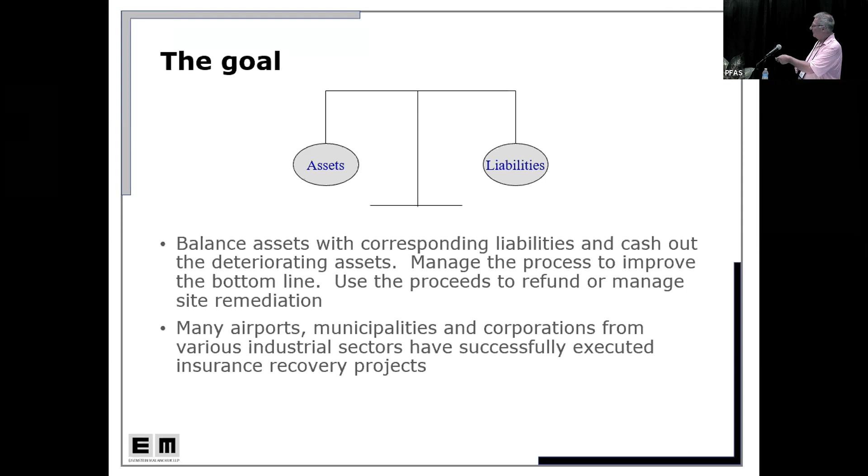Why does this work? Why does the insurance company even answer the phone when you call and say you want to submit a claim?

First of all, it's confidential. We can do it under attorney-client privilege. Sunshine laws and things like that get in the way, you may not be able to keep it confidential, but we can if you want to. You purchased insurance and paid your premiums, you're entitled to reimbursement according to the terms and conditions of those policies. The insurance companies wrote the insurance.

Insurance companies have reserves set aside for their liabilities, and your liabilities are part of their liabilities, so they have reserves set aside. And don't forget, insurance companies buy insurance too. So if they do a deal with you, they release the reserves and make a claim against their reinsurer. That's why the process goes on, because it's not such a bad deal for them.

They get these liabilities off their books. If you go to them and they say, what do you want? And we say, we want to talk about PFAS. And they say, well, there's no regulations, blah, blah, blah. We say, well, we're giving you a fire sale today, because do you think it's going to get cheaper in the future or more expensive? So on and so forth. And it's in their best interest to settle in the midst of some uncertainty.

Thank you, Dr. Malanchuk. I'm glad to see some additional faces. Maybe for next year's forum we should recommend to Gene that he serve adult beverages for the last session—it might attract a lot more people. But that's all right, it's Friday.

Our next speaker is my coworker, Rob Bogert. He's our engineering service line manager, and he's going to be discussing considerations in removal and replacement of AFFF.

Thanks, Alan. And where's the clicker here? And for those of you online, Alan's just joking. There's about 250 people here live, and we appreciate all of you.

So like Alan said, I'm going to be talking about something that's a little bit off topic. I'm a remediation engineer, but this project really wasn't related to remediation. It was related to PFAS and AFFF.

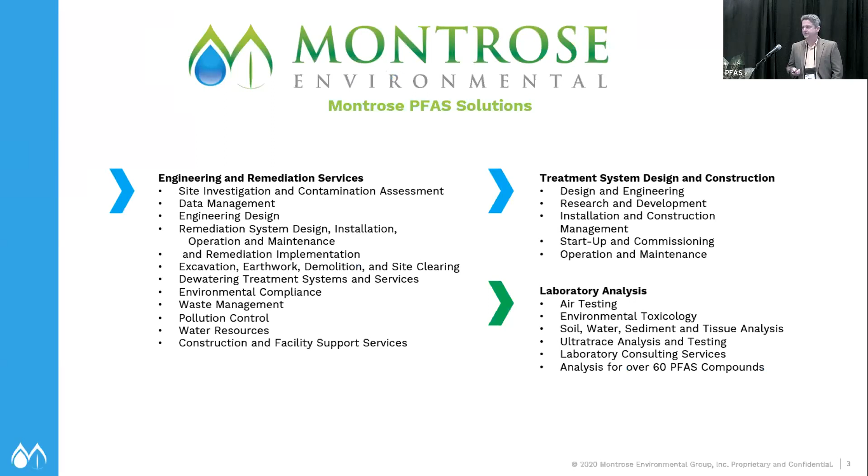I won't give myself a plug—you can read about me in my bio online—but I wanted to point out my coworker who was instrumental in this process, Ashley Rose. He's the leader of our construction and field services. He and his team were largely responsible for the work that you'll see in my last few slides. Again, I'm with MSE Group, work with Alan. We're part of the Montrose family. We're a full service consulting firm, but we also have sister companies that do treatment system design, and we do in-house laboratory testing.

After that shameless plug, I'll talk a little bit about the history. This is somewhat redundant with some of the other talks we've had. We heard that this was discovered accidentally way back in the 30s, first used commercially in the 40s. AFFF wasn't created until 1966, and then later used in 1970. From the 70s through the 90s was a relatively quiet period for PFAS and AFFF.

However, there was some concern raised about the environmental issues back in that period, but it wasn't really until 2000 that we started seeing changes in manufacturing, with PFOS and PFOA being downsized, particularly in the United States. I believe it's still manufactured in other parts of the world, but it's not currently made in the United States.

Recognizing this issue, the DoD revised their military specification for AFFF—I'll talk about that a little bit more in detail—to establish a limit for the amount of PFOS and PFOA that can be in AFFF. That was issued in 2016. And then starting in 2018, the major branches of the military started a voluntary replacement of AFFF to remove what's referred to as the legacy AFFF, the mil-spec material before 2016. That work was recently completed by all branches of the DoD.

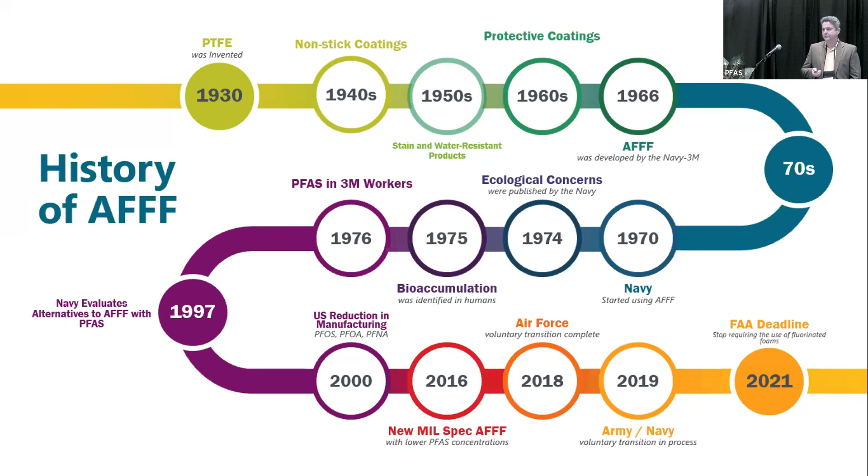Something else I wanted to point out was the military specification goes beyond just Department of Defense. The Federal Aviation Administration, FAA, up until this year was required to use AFFF, the military specification blend. They're currently evaluating options to use, and that's part of federal law right now for them to come up with a new alternative.

From as far back as I went, the past 20 years or so, PFAS and AFFF aren't really mentioned in DoD spending bills until around 2019, which had maybe one reference to PFAS. In 2020, the National Defense Authorization Act had multiple references to PFAS. That act is issued every year and funds the DoD. In 2020, there were 172 PFAS chemicals added to the EPA's Toxic Release Inventory.

This formally established that fluorine-free foam was going to be needed in the future as a replacement for AFFF. It's kind of a bad acronym: F3, fluorine-free foam, is completely different than AFFF, aqueous film-forming foam. It's a bit of a tongue twister, but fluorine-free foam, good - F3, good; AFFF, not so good. This also required it to be phased out by 2024.

More importantly, it ceased all live testing operations of the system. They use other methods so they don't have releases while testing their systems. There are additional changes, but the most recent one - if everybody remembers Schoolhouse Rock, 'I'm just a bill' - this bill became law. It was presidentially vetoed back in December, but passed with a congressional override of that veto, so it is now law. As Alan mentioned at the beginning of the session, there's $1.4 billion set aside for cleanup of federal installations.

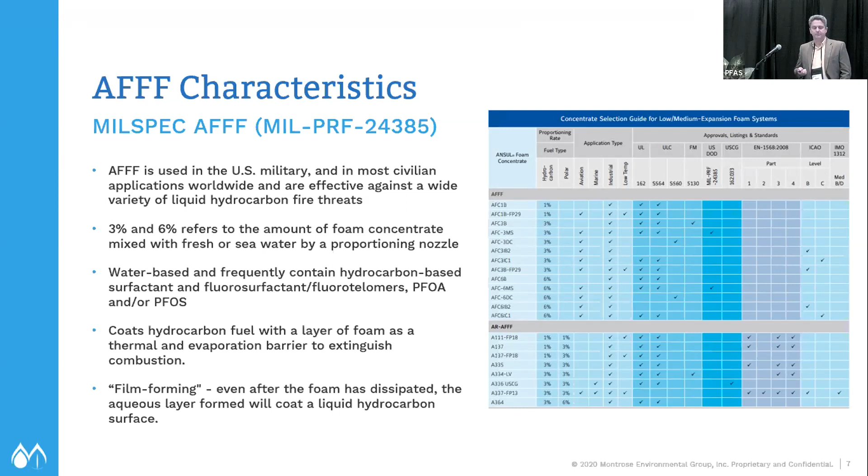So mentioned that the mil-spec and revisions - legacy AFFF, before 2016, there wasn't a limitation on the amount of PFAS that could be in the foam. It contained the longer chains, the C8s, carbon 8s, which we all know now as PFOS and PFOA. The new blends only have C6 chains, the short chains, so there is no PFOS and PFOA in the concentrate.

So why can you have 800 parts per billion, which is a fairly large number compared to environmental standards? It's because the manufacturing process will introduce some of those trace contaminants. It's at PPB - the definition of trace is a suspect when you have to treat down to 70 parts per trillion. So it's not added, it's not present, it won't break down into PFOS and PFOA, but the military specification allows for some of this material to still exist in the formulation.

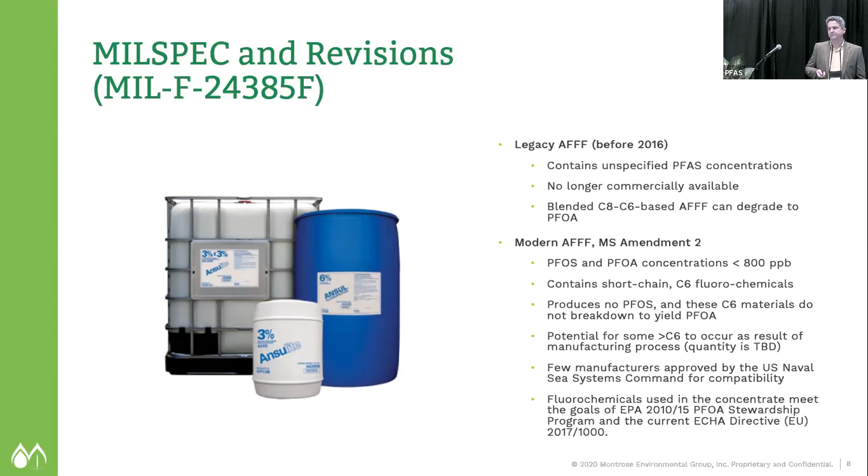Deep well injection is legally allowed. Our private client did not want to consider that option. We were only left with options for incineration or landfill bulking and then landfill.

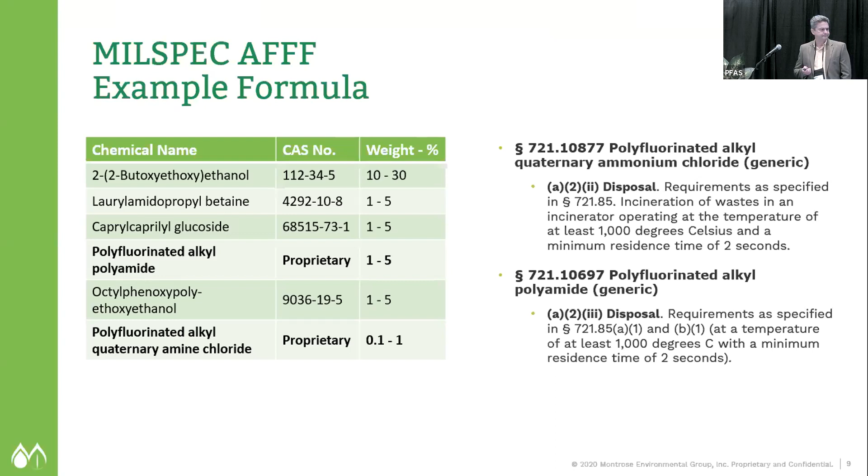Our project was actually replacing the AFFF material created before 2016, manufactured before 2016, and still in place. We did work at 2 different facilities, 6 different aircraft hangars, replaced foam in 30 tanks, upwards of 12,000 gallons of AFFF concentrate. And the cleaning process generated a little over 9,000 gallons of rinsate.

So there's a lot of things we had to consider when we started this project. First and foremost is that not all the systems are alike. There's 2 main types of systems.

There's the open atmosphere type, which just means the AFFF is at atmospheric pressure. And there's closed systems, bladder tanks, where the AFFF itself is under pressure from water surrounding a rubber bladder. It just affects how it's delivered, the mechanical equipment you're going to be contacting and touching, and it just changes how you're approaching it.

Common issues are related to handling. There's special pumps that should be used when handling AFFF. They're centrifugal pumps, but they have a lower shear. They help keep the material from foaming. You don't want to remove this stuff and create 100 times the volume you started with.

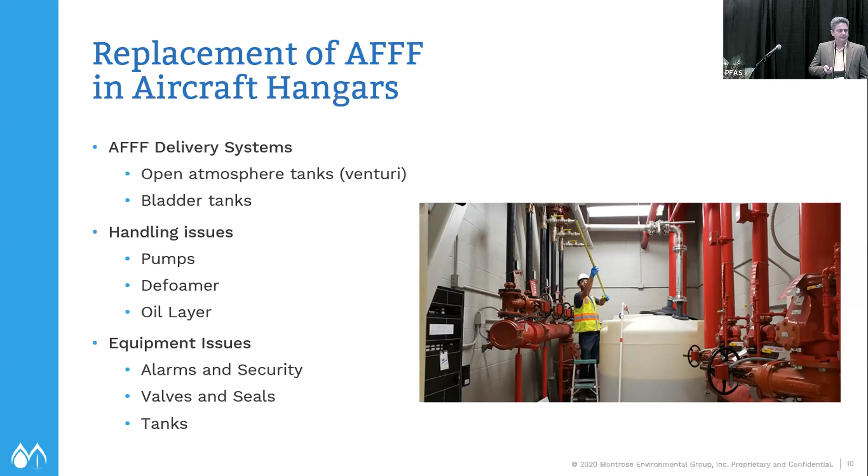And the other thing is the tanks. There's nothing special about the tanks - they're just polyethylene tanks. In most cases, the bladder tanks are a little bit more complicated. But when we did our pre-inspection, we noticed that some of the tanks had what looked like some seal added to keep the integrity. So we were a little worried about the tanks leaking after we took them apart and cleaned them out. So we went ahead and bought a standby tank to have ready in case we couldn't get a good seal. One of the biggest concerns we had was wanting these systems to be down for as short a period of time as possible.

The environmental issues with the foam can't impact the day-to-day operations of the aircraft. So the alarm lockout was crucial.

Emptying and cleaning the tanks took about an hour or so to completely evacuate a tank, but then it had to be cleaned. You're adding water, which doesn't mix well with AFFF, so you're washing down the tanks. Got to make sure the tank's completely dry. We used blowers to force out as much of the rinsate as we could, but then we needed overnight drying to ensure the last bits of moisture had been removed.

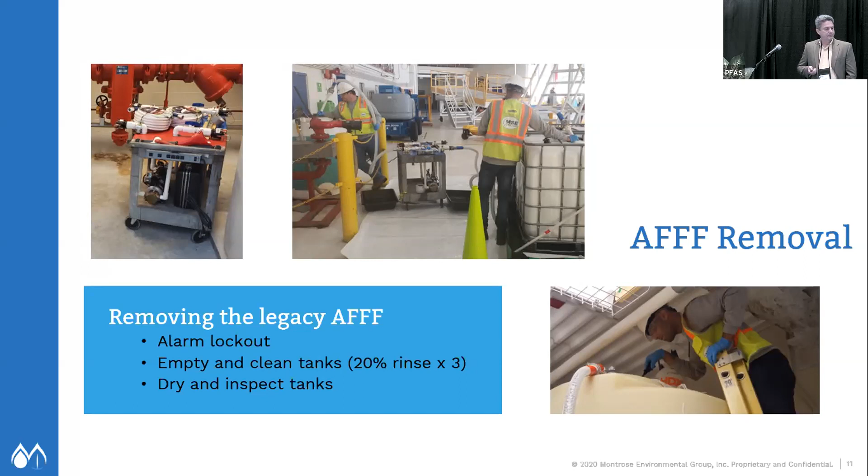Cleaning the delivery piping proved a little more complicated. We made sure we had the right mechanical fittings on site because we had a suspicion that those would leak. So we replaced all the mechanical O-rings as a matter of caution because we wanted to minimize downtime. The pipes we had to triple rinse 100% of the volume, but being smaller volume pipes, it only contributed about 20% of it. And of course, we had to contain the rinsate for disposal.

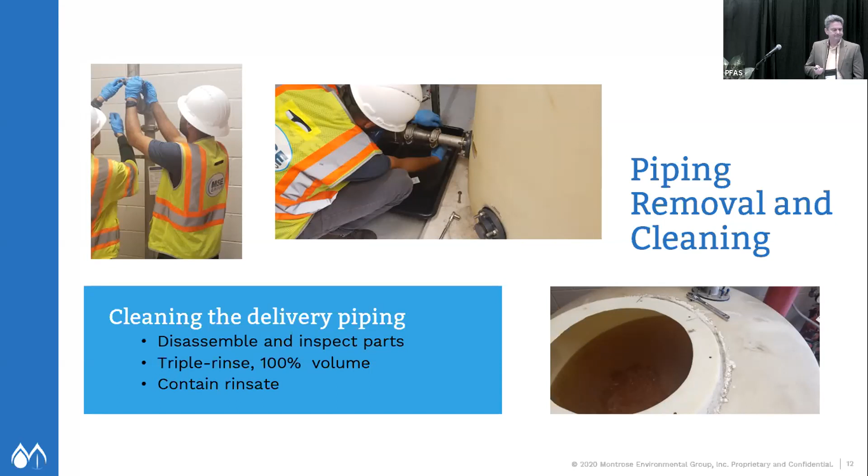Some of these photos just show the process. That was the brand new tank that we brought in.

Didn't need it the first time, needed it the second time. We ended up having a tank that we could not meet tightness, but fortunately we had a spare, so we could do that offline. As a precaution, we went ahead and ordered another one, which we didn't end up needing, but it was a $3,000 tank versus several weeks of downtime for our client. So it was money well spent.

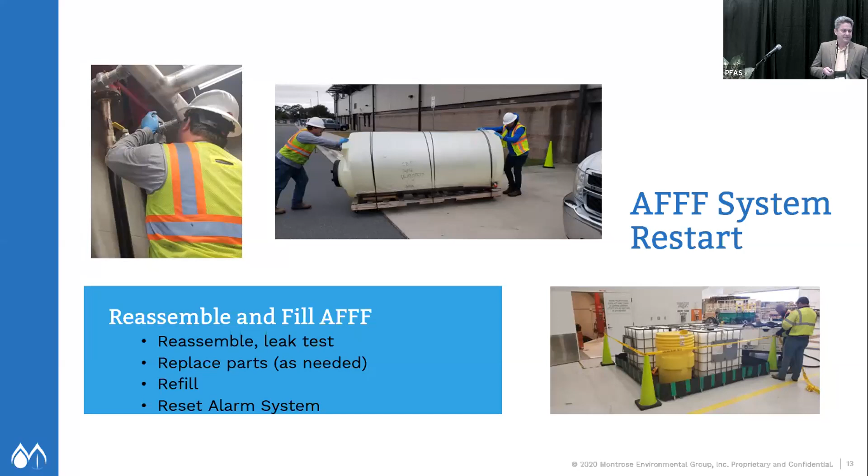Reassembly and refill is simple - reverse the steps you just did, get the alarm system back up, and get out of your client's hair.

All of our waste was incinerated. We did have an option for bulk landfill bulking. At the time, the client as well as us thought that incineration was the better option.

For the rinsate, if we had to do things again, I would say we would probably look to on-site treatment options. We had about 9,000 gallons of rinsate split between two different sites, two different mobilizations, so we were dealing about 4,500 gallons each time. It's a small volume relatively, so getting the price point to be effective for bringing in a remediation system versus sending it off-site with the concentrate was the main issue there.

But since we did these projects, there's been advancements as well as increased availability in treatment systems. So if we had to do this project all over again today, we would probably go with the treatment.

I'll close by saying, if we have to go back and redo this project - all the stuff that has been put in throughout DoD facilities is still AFFF. While it's a much better blend of AFFF than the legacy stuff before 2016, it does not meet the military's current plan to use a non-fluorine foam. So that's going to have to be handled over the next several years, and it's a lot of military installations.

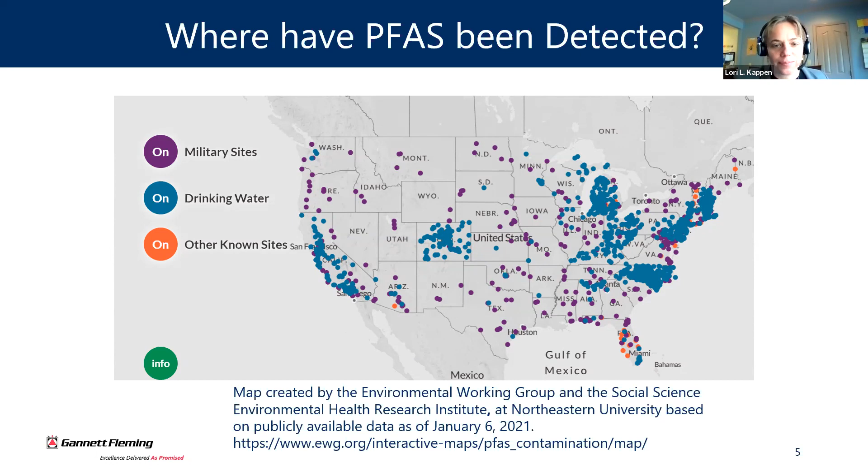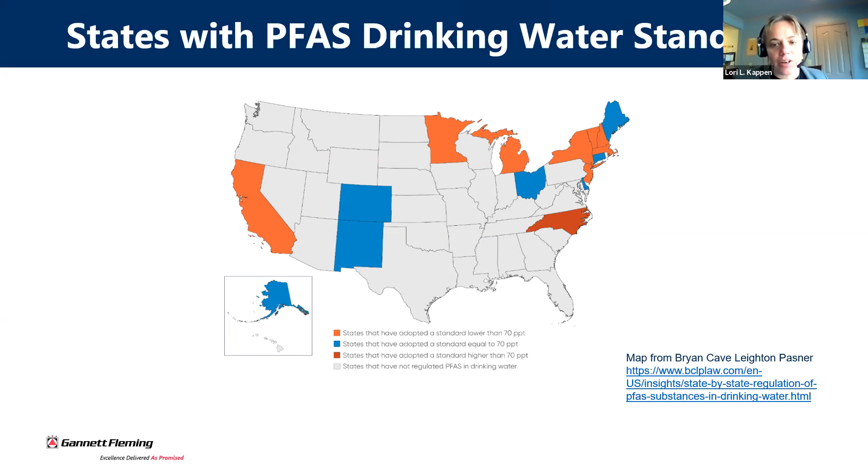Since I'm focusing on drinking water aspects, a number of states have already passed their own state standards. Some are setting it at the federal health advisory level of 70 parts per trillion. Some are setting it significantly lower, in the range of less than 20 parts per trillion. There are a number of states that have initiated PFAS regulations within drinking water or groundwater, which obviously impacts drinking water. It's likely to continue to increase as states and the federal government move forward with this.

So again, I expect you all to memorize this. I will give you a quiz at the end.

No, just to highlight again, there's such a wide variety right now of how states are choosing to regulate this, and at what levels, depending on various research they've done, their comfort level with safety factors, et cetera. A lot of these numbers are pretty close to the detection level for some of these, so they're basically regulating it at the level that you can even detect that it's there. This leads to some challenging treatment possibilities, just because you are trying to remove it to such low levels.

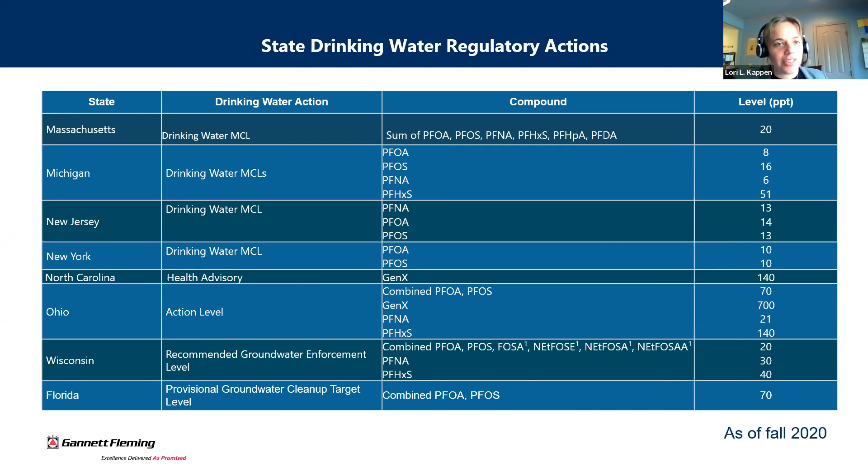Federal regulations - I understand you've probably been through this already, so I'm not going to cover this in a lot of detail. I did want to point out that the federal government is moving forward with this. In February of this year, there was a final regulatory determination that 2 of these PFAS will be regulated. And in March, the 5th UCMR base requirements came out. So from 2023 to 2025, there will be a nationwide analysis of 29 more PFAS in drinking water. As more data comes out, as they understand what's there, and research on health effects comes forward, we will continue to see more of this.

Going through PFAS in general, PFOA and PFOS have really been the 2 primary agents focused on, just because those are the ones that have federal health advisory levels set for them. For various compounds this will vary a little bit because they have different adsorption properties, but moving forward we're really focusing primarily on PFOA and PFOS. In general, these will all hold true no matter what you're trying to treat. You need to consider primarily the effectiveness of your treatment technology when selecting one.

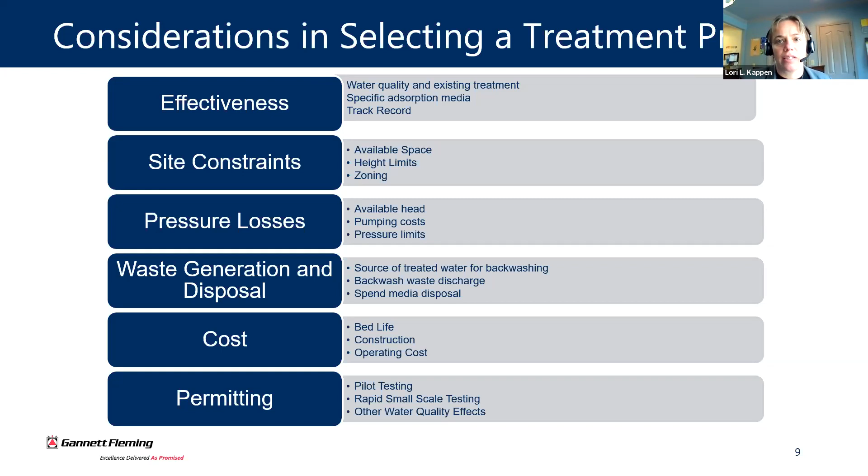So we're going to step through some of these in more detail, and in particular in context with various projects that we have done designing and selecting some treatment processes.

So, conventional treatment alternatives—I say that because these are the ones that have been fairly well established to work and have been in treatment processes for a relatively long time, whether they've been used for PFAS or not.

Two large groups: one is adsorption technology. You adsorb it onto some sort of a solid media where it's removed from the water and transferred over to some sort of media, usually granular activated carbon or an anion exchange resin. Powdered activated carbon will work too, but there are cost impacts to using powdered activated carbon instead of a granular activated carbon.

But the other option is filtration. They're limited because you have to have very small pores to remove PFAS, so it's kind of limited to reverse osmosis or nanofiltration. In some instances where you're treating water and you already have that type of process in, either an industrial type treatment or for some specific purpose, those will remove PFAS, and they are absolutely an opportunity if you've already got that or you have a need for it. Generally, though, if you don't have another need for those processes, your adsorption technologies are going to be the most cost effective for most facilities. So those are really the processes we are going to be focusing on moving forward.

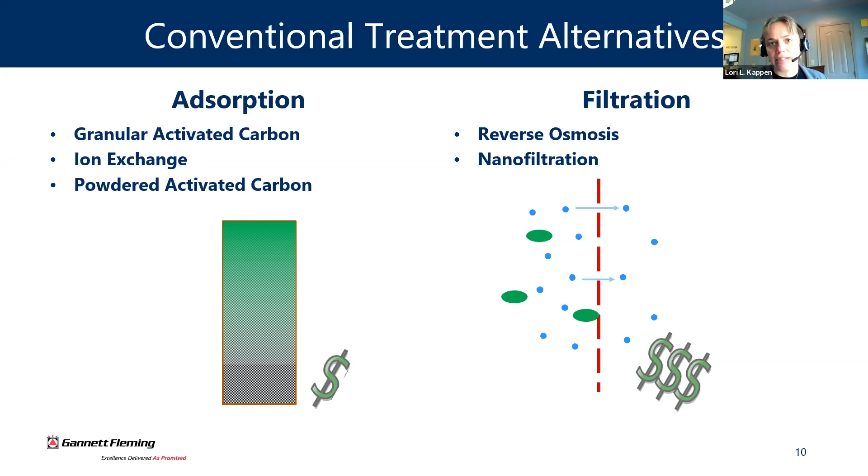I did want to mention other alternatives. There's a lot of research in this right now—electrochemical oxidation processes, foam fractionation, aggressive redox, and incineration, of course, is also a treatment alternative.

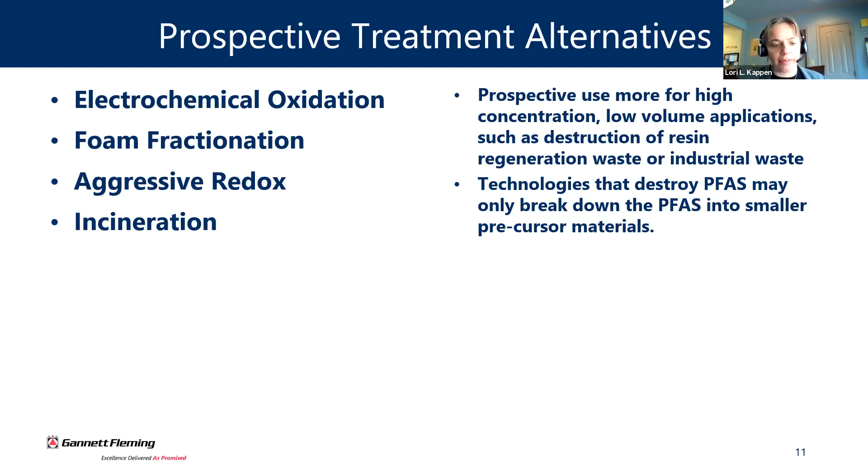These types of things have some benefits in that some of them will actually deteriorate the PFAS, making them more of a long-term solution for getting rid of them. Some of them are just taking it from a low dilution to a more concentrated solution that makes this easier. But most of these are not going to be very cost effective at the concentrations found in drinking water or drinking water sources. They are, however, a really good opportunity for further treating waste from those processes, either as a way to ultimately dispose of the concentrated PFAS solution or the media, to either repurpose the media or just fully get rid of that PFAS.

So as I mentioned, there are really two primary adsorption technologies. One is activated carbon, which has been used in water treatment for a very long time. It's fairly well known as far as how well it adsorbs the PFAS and what some of the impacts are. Resin, or anion-exchange resin, has been around for a while too, but its effectiveness in removing the various PFAS was a little less well established as this started to come out as something that needed treated, as they were developing these regulatory levels.

Over the past two or three years, there's really been a huge build in information and data on the effectiveness of the resins. So that's becoming increasingly a process that's looking attractive to various people depending on their site specific needs. A couple of the reasons are the footprint that these take up, and they are able to remove PFAS to low levels for a long period of time due to their adsorption properties.

They're able to do that with a much smaller volume of media that needs to absorb that, with much higher loading rates. That translates to smaller treatment process units and a smaller footprint, which can also translate to cost savings in constructing the building to put this on. If you need to purchase a site, that takes less land. So that does translate into certain benefits.

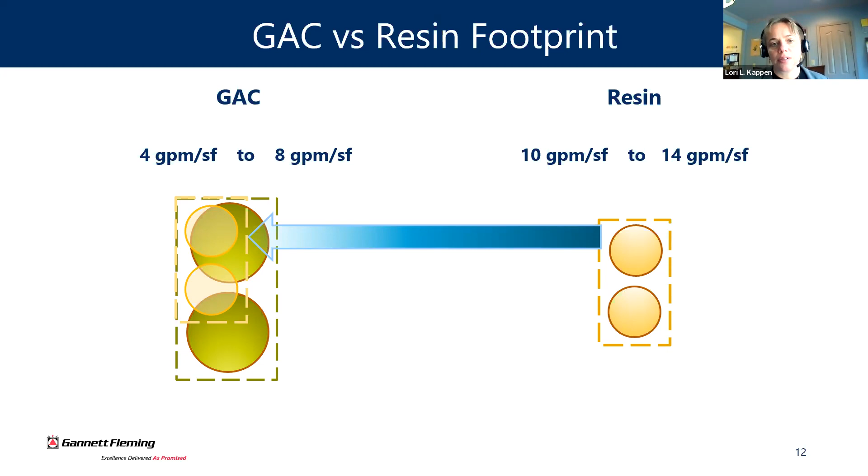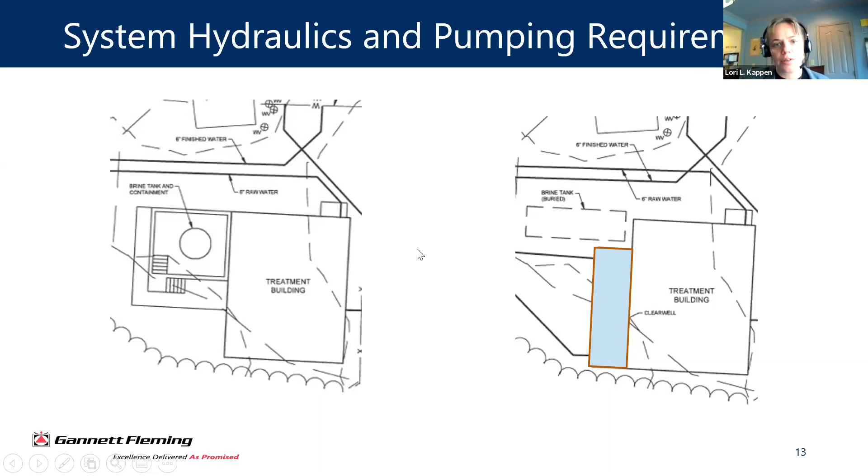Some other site considerations - these are a couple rough layouts we had done for one site, where in one option we were looking at the need to put in a clear well after the treatment process, so you could pump straight through it and then further pump into the system. That may be the best option where it's not feasible to change out the well pump to increase the head through the treatment process, or if the pressure in your system is so high that it's not practical to pump all the way from the well through the process at that higher pressure. That affects the cost comparison, because you now have to build an extra water storage tank somewhere to provide system equalization and a place to pump the water out of. Those are site-specific considerations depending on the pressures you are operating.

Some ancillary facilities that may be required. This is an example from one of our sites that was using GAC, and they had a very limited sewer capacity to discharge their waste to. So the GAC was backwashed periodically as needed to restore head as head loss built up. There's a backwash waste equalization tank that goes into that system, then pumped from there at a low rate into the sewer system so they're not overloading it. There's also an influent wet well, needed to capture water from their aeration facility, which was then pumped through this new treatment process, and a treated water storage from which it is transferred back over to their high service pumping system into the distribution system at this site. Those are some additional facilities needed to facilitate this particular treatment process.

Ion exchange resin is smaller and has a significantly smaller backwash volume, so this backwash waste equalization can potentially be reduced for sites that need that because of their waste disposal options. So that's a consideration in selecting a treatment process.

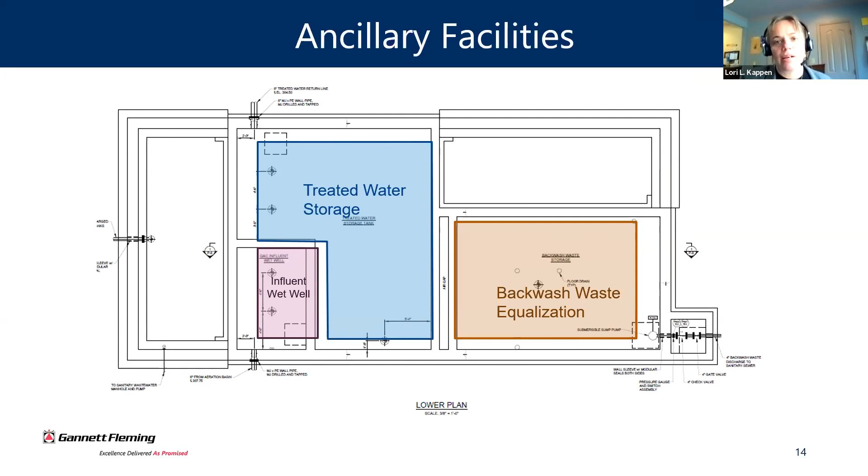There are also site considerations you need to think of from other perspectives. In this case, this client's facilities - their 2 wells that are going to have treatment added - are located in a local ballpark. So they're obviously concerned about minimizing the amount of space used for this treatment process, but also some of the aesthetics involved. They also need to consider delivery trucks coming up and down these gravel parking lots. Trying to minimize that is something they want to do, because they don't even own this land - they lease it from the township. The township obviously has an incentive to make sure this treatment occurs, but you want to work with them and try to minimize the impacts on the public as they're using this ball field.

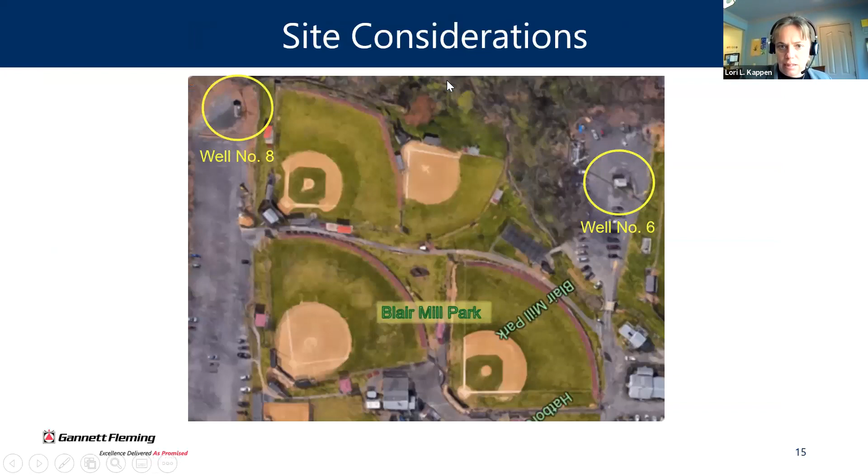Comparing some design parameters - this is a recent evaluation we did for installation at a treatment facility in New Jersey. Looking at the flow rates, if you were using GAC, based on the water quality parameters they were recommending a surface loading rate of about 7.7 gallons per minute per square foot for GAC treatment, and a higher loading rate of 10.2 gallons per minute per square foot for the resin treatment option.

With that higher loading rate, you could use only 2 treatment trains if using some sort of ion exchange resin, whereas you would use 3 treatment trains to treat the whole process with a GAC contactor. The empty bed contact time per vessel for the GAC is also higher - 12 minutes for the GAC options and only slightly under 3 minutes for the resin options. That leads to a significant height difference in the vessels, about 27 feet for the GAC vessels, and about 16 to 17 feet for the resin ones.

And that kind of height can make a big difference in the building cost that you need to build a superstructure around these for shelter, because a 20, 25, 30 foot ceiling or even higher to provide some clearance adds a lot to the building cost. So that's a consideration there.

You'll see that the bed volumes for breakthrough of the GACs, based on manufacturer projections, was about 50 to 60,000 bed volumes of water treated through the resin or the GAC before it would break through. Whereas with the resin options, you were getting much higher bed volumes. However, keeping in mind that the beds for the resin are about 3 times smaller than the GAC, you end up actually having fairly comparable changeout frequencies. So with each of those, you're looking at a changeout frequency of about every 1,000 to 1,300 days.

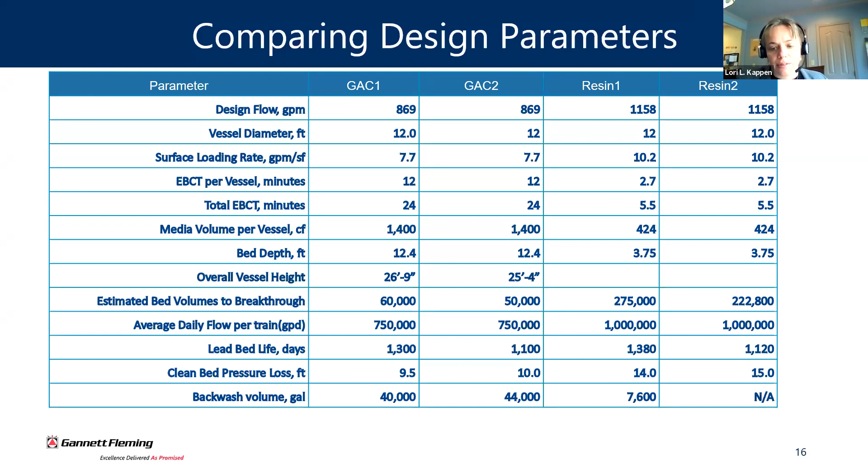So about every 3-4 years you need to change out this media. It's a higher volume of GAC that needs changed out, but on a volume basis per cubic foot, GAC is less expensive, so it ends up almost balancing out in terms of media replacement costs. That's sort of reflected here, where it's a little higher for the resin, depending on the resin, to some degree significantly more, whereas some of the GAC versus resin replacement costs are fairly comparable depending on what you would select in this case.

The resin power costs are a little higher because you do get more head loss through those, operating at higher flow rates. You have more wastewater disposal costs with the GAC because you need to backwash those more thoroughly. As a natural product, you get some loose GAC in there, some GAC powder when it's delivered, and that needs to be backwashed off so it's thoroughly clean before you place it into service. The resin does not have that to the same degree, so there's a little bit of rinsing done when it's first installed, but it's not the same volume of wastewater.

There is a cartridge filter changeout cost - those are for filters upstream of these that remove small particulate matter so it doesn't clog up your treatment process. Ultimately, you can see that in this case, the life cycle costs as far as the operating costs was fairly comparable between the two, a little bit higher for the resin. But ultimately, the resin costs ended up being lower because of the construction costs, not only for the system itself, but also for the superstructure and pumping facilities you need to construct around that. So that's where the cost played out in this case - you end up with a slightly lower anticipated cost if you go with a resin option.

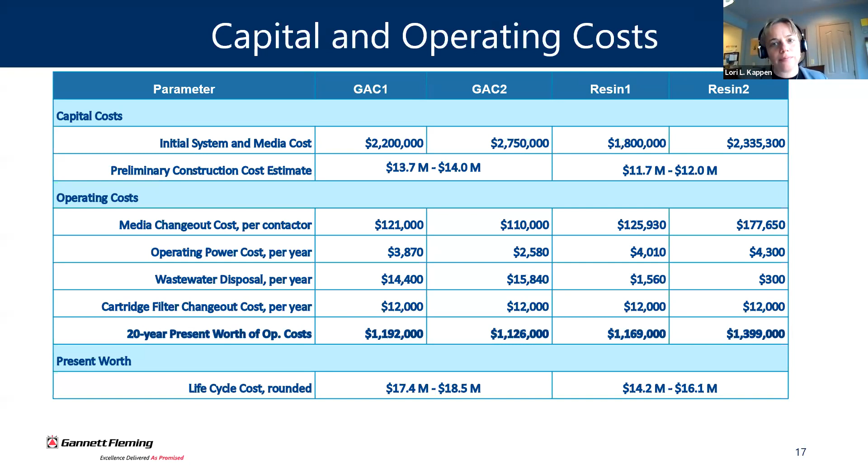Pilot testing for GAC - a rapid small scale column test is commonly used for that, and that can give at least a reasonable estimate of comparison between carbons. It may not give you a completely accurate representation of long-term performance, but if you're just comparing different GACs, it can give you a pretty good idea of which ones will work better.

Resins, you can't really do a rapid small scale column test with them because of the impact on them - if they're ground into a fine powder, it changes the properties, and that's not going to be representative of full scale performance. If you do need to do a pilot test, initially most states were requiring pilot tests because it's a new technology. They want to verify how it's going to perform, as well as any other side effects it may have on water quality that could impact things like corrosion control. As that data becomes available for multiple sources and multiple resins, the need for pilot testing is going down as governments and regulators develop a comfort level with this resin and as that data becomes available. So we really can understand how it will perform without necessarily needing to run a long pilot test.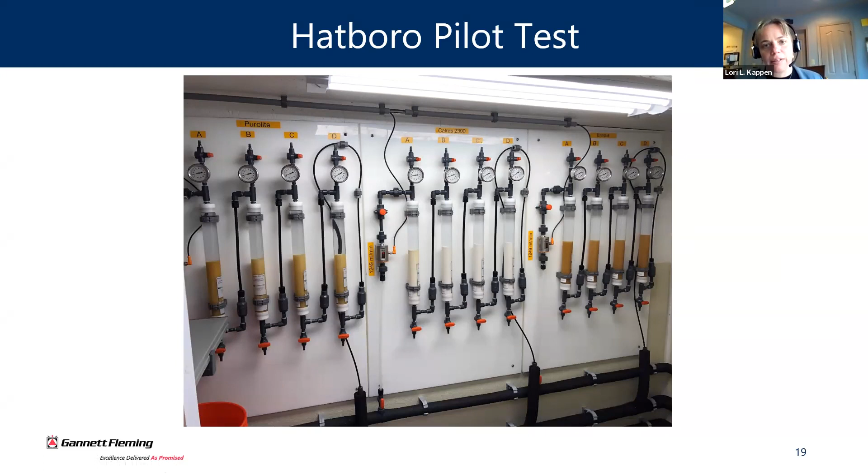A key thing you need to be aware of is that anion exchange resin doesn't perform the same for every water quality. Similarly, the same is true for GAC, so you want to make sure you have a GAC that's been proven effective to work for PFAS specifically.

In this case, we tested 3 resins. One of them started to break through at about half the bed volumes of the other 2, slightly less. When that was observed, the client decided to stop testing that one, deciding the other 2 were showing more effectiveness. So they continued testing on the other 2, and those had a much longer bed volume.

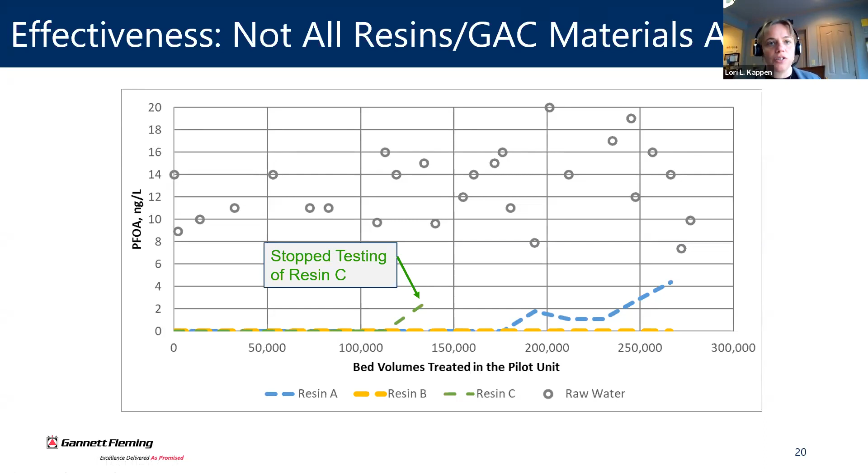One of them went up to about 180,000 bed volumes before there was a low level breakthrough. The other one, by the time they stopped testing at about 260,000 bed volumes, still had not shown breakthrough through that final column.

I want to point out that bed volumes are not necessarily exactly equivalent to how frequently you need to change it out, because when you have a GAC contactor with an empty bed contact time of 10 minutes, that gives you like a 10,000 gallon volume versus a 3-minute empty bed contact time, you may have a 3,000 gallon bed volume. So if you're treating a certain flow rate at 1,000 gallons a minute, you're going to get about 19,000 bed volumes from the GAC, but you end up treating about the same total volume before you need to replace it, even though it's much shorter bed volumes for the GAC.

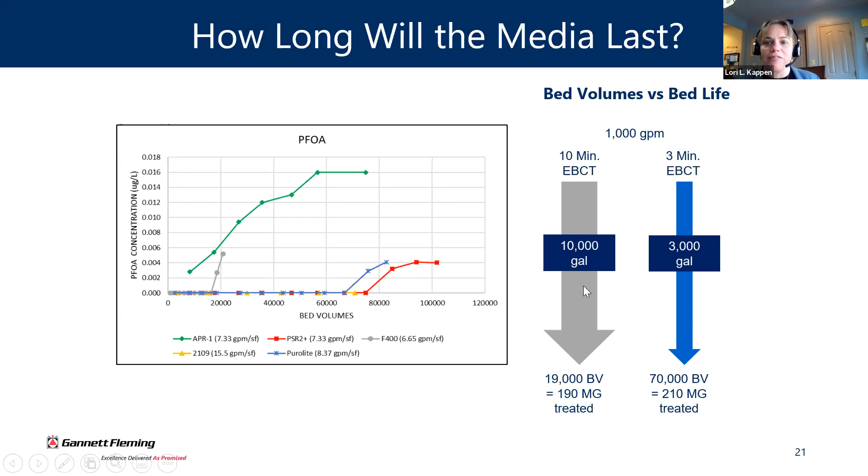I want to note some other water quality parameters that will impact the effectiveness of GAC and anion exchange. For the inorganics that will impact that, in particular anions, nitrate and sulfate are 2 big ones. Some other anions will also impact that. If they're absorbed onto the ion resin, it will decrease how well it will be able to absorb PFAS because they're just competing anions.

Other inorganics that can affect us - if the water is hard water, or if there's dissolved iron and manganese in there, that can precipitate out as water goes through these treatment units, either anion exchange or GAC, and you need to be careful to control that. Otherwise, that will end up precipitating out in the filter or adsorption unit, and that will reduce the effectiveness. So that's a consideration going through this process.

In the organics, most resins don't absorb most kinds of natural organic matter or VOCs, SOCs, but GAC will absorb it. That's again a consideration. If you have a lot of VOCs in the water, your GAC will absorb it, which is great for removing VOCs, but that uses up your adsorption capacity, and then you end up breaking through with PFAS much more rapidly.

Another minor consideration is that where there's radon in groundwater, the GAC will absorb the radon. It's a great treatment benefit. It doesn't really impact how well it will remove the PFAS, but you do have to be aware that as it's removing radon, it gets concentrated, and at the end, the GAC may have a low-level radioactive level in it that you just have to wait and allow that radioactivity to dissipate somewhere before it can be disposed of, so that it's not a radioactive waste.

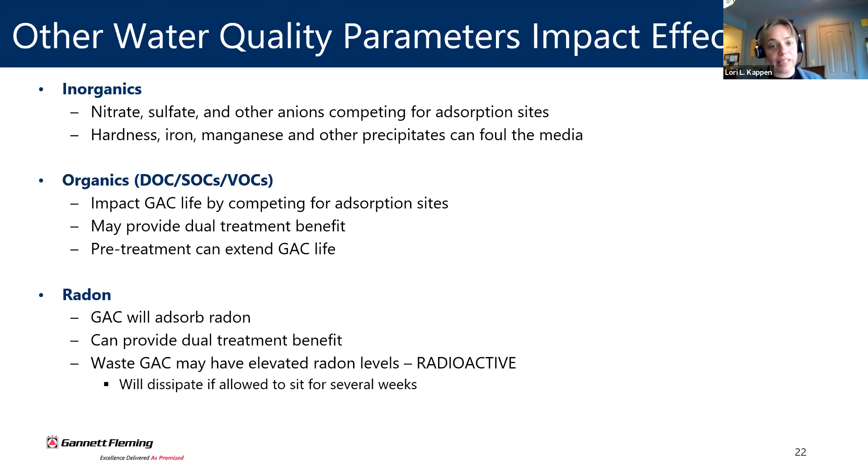An example from one facility we recently did an evaluation on - they had an existing treatment process where they pumped through an air stripper to remove VOCs. Then it went to a reservoir and then pumped out to the distribution system. We looked at 2 possible locations to install this new treatment process for PFAS - one was to place it basically after the air stripper, and one was to place it before the air stripper.

If you place it before the air stripper, the GAC will remove your VOCs very effectively, which is great, except that when it's removing all those VOCs, they're using up the adsorption sites, and you suddenly aren't absorbing your PFAS very well. So talking with the vendors, their models estimated about a 2-year life for your GAC before it needs replacement when it's placed downstream of the air stripper.

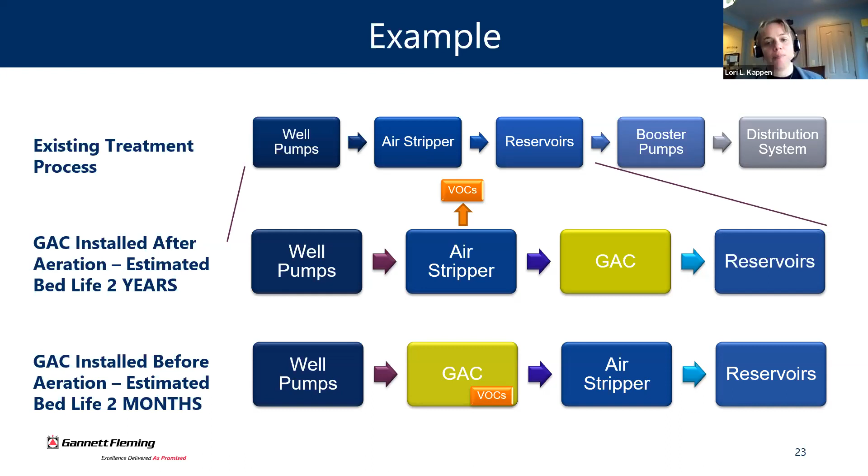If they wanted to place it upstream of the air stripper, you get about 2 months of life before your PFAS start to break through. So it sounds great to use this GAC, you can get rid of your air stripper, remove your VOCs and PFAS all in one treatment process. Not a great idea if you're trying to remove PFAS specifically, because of the impact that you have. So that's something to be aware of as you're going through existing treatment processes, how that's going to integrate into your process.

A quick slide on waste handling. You're all aware now that once you have gotten this PFAS out of the drinking water, it doesn't just go away, it's still there. If you're using an adsorption process, it's absorbed onto the media. You then need to figure out how to safely dispose of that media. In general, for now, the primary way is to just incinerate the media with the PFAS, and that was just discussed in the presentation before here. If you incinerate it properly, it generally destroys the PFAS. There is still some research being done into that, but that's generally kind of an accepted method.

GAC can actually be regenerated, and tests have shown that does eliminate the PFAS - you can destroy the PFAS and reuse the GAC. So for large facilities, that's definitely a potential cost-effective way to handle that.

If you would use something like reverse osmosis or nanofiltration, you end up with a concentrated PFAS waste that is usually able to be addressed by sending that concentrated waste through a much smaller GAC bed or an anion exchange bed. So you transfer that to a solid media where that can be then incinerated or otherwise disposed of. I did mention earlier some of these newer technologies that are looking at ways of breaking down this PFAS - those are potential future ways of handling this waste that also will destroy the PFAS.

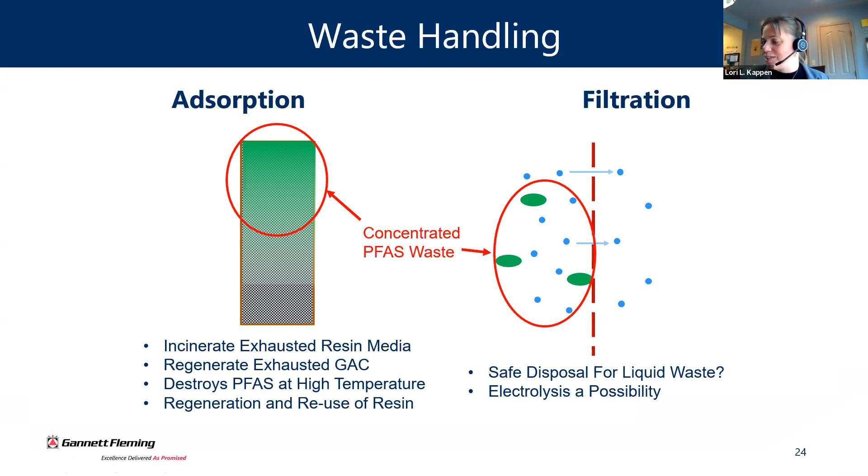I don't know if I left enough time for questions or not, but I do want to say thanks, and our contact information is here in case you did have any questions and wanted to follow up with us. So thank you all for your attention.

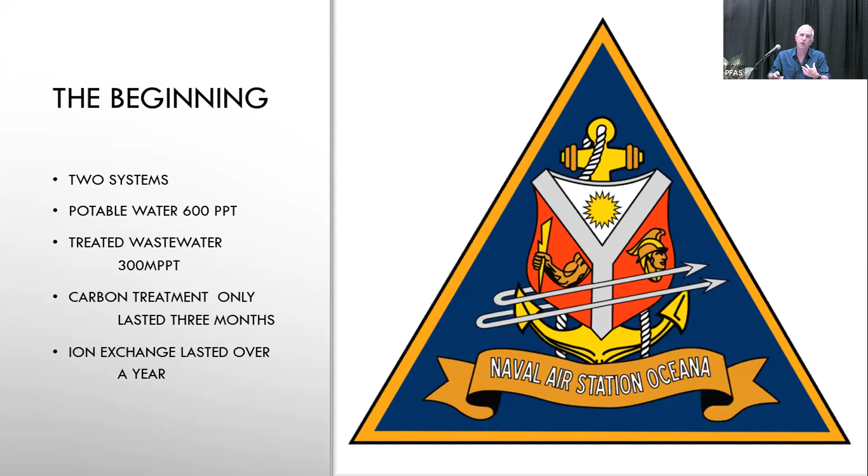2 years into the process, ion exchange became recognized as a potential treatment. 3.5 years into the process, we finally got the Air National Guard, in this case, to switch over, and they still have not done a change out after we put the ion exchange media in. So that was a good example of how the ion exchange media was able to last a lot longer, handle the concentrations, and still keep us down to non-detect.

Well, then the next site I was asked to do, I felt like Mikey - give it to Barry, he'll figure out a way to do it. I sat down with a couple of friends, engineers, and we literally did this design on a napkin. So how do you get rid of 1 million parts per trillion of PFAS with human waste inside?

What happened was one of the hangars, the AFFF container leaked, got into the sanitary. They walk around the water treatment facility once an hour.

They came out and all of a sudden there's 12 feet of foam at the facility. They shut down the facility very quickly, and as you can see, they pumped it

into two clarifiers. We were told we had 125,000 gallons of water to treat, so be prepared to treat that. Unfortunately, the engineer gave me cubic feet of water and said it was gallons, so we had 7.48 times more gallons, almost 1 million gallons of water to treat, as opposed to 125,000 gallons. And lucky for me, I priced it at $1 per gallon.

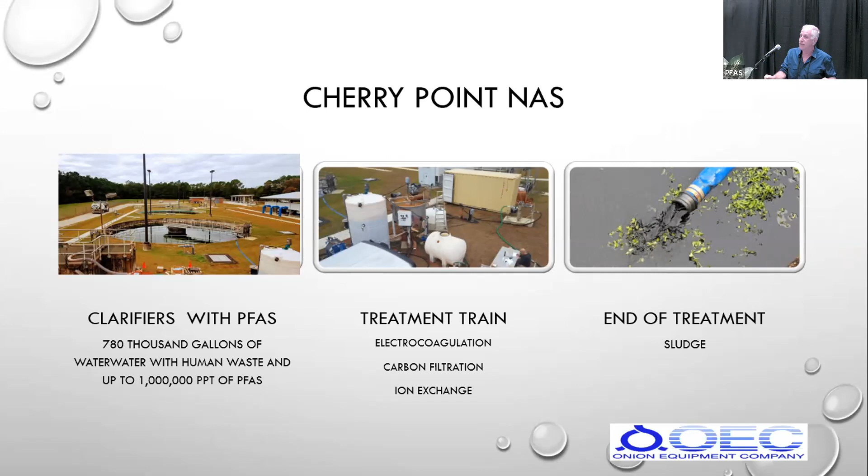So what we wound up doing is we used a filter used in the nuclear industry, and we took out the rest of the compounds from that. So that was the second major project, and we had a bunch of lessons just from that. On the very right, you can see what we wound up treating at the very end - a sludgy material where we just separated out the water as best possible, and then they wound up disposing of it after that.

So this is a site in Boulder, Colorado, Boulder Highland. We had a volunteer fire department that was given a tote of AFFF, but they didn't have any firefighting equipment, no foam equipment, just a tote. In 1995, it was a volunteer fire department, and they decided to dump it on the ground - the whole tote. The volunteer fire department at Boulder Highland is at the top of the hill, so all the wells down gradient, all the homeowners down gradient, wound up getting their dose of PFAS.

The first homeowner that contacted me lived about 50 yards from where they dumped it. When I got to her place, she was still drinking 600 PPT of PFAS, and that was 4 years after it happened. All those years she was drinking that water. And when we did the analysis, we found out that her water was also radioactive.

So when we put our system in, she had no cancers, which was amazing. But we wound up taking out the PFAS and taking out the radiation, uranium. It was actually light doses of uranium she was drinking. So that was my next system. Again, totally different set of problems, including uranium.

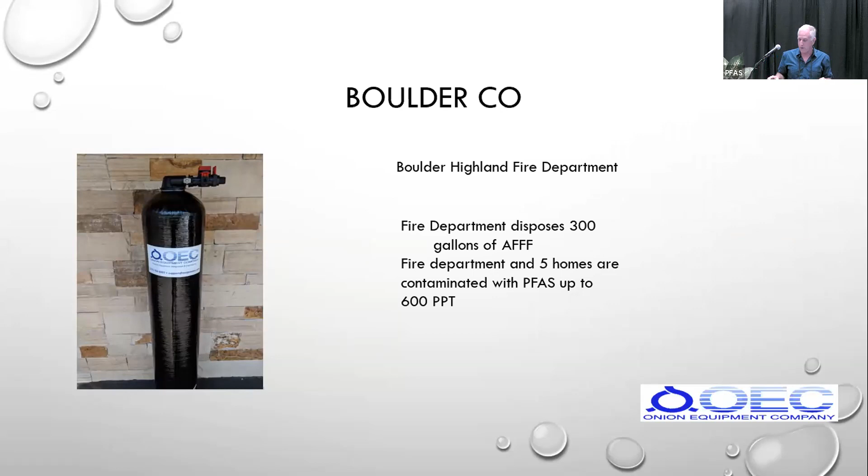We've been lucky enough to get exposed to treating ponds. We have 2 active systems. One's at Peterson Air Force Base, which is irrigating the golf course for the generals, and the other is Stewart Air National Guard in New York.

At the initial site in Peterson, the irrigation wells were taking the water from the bottom of the pond, so we were always getting new algae and things like that. Part of my decision process initially was to load up with particulate filters and use 5-micron bags, which they were changing all the time. The system consisted of carbon first, because we had VOCs coming off the runways, and then the contaminated water coming from the old fire testing area. So we used the carbon to backwash and take the VOCs out, and we had the 5-micron filters.

What we didn't know about 5-micron filters is that worm eggs pass through them. So all of a sudden our carbon vessels got loaded up with worms, something you never expect. We wound up having to take that out and going to sand filtration. Eventually we brought in a floating pump, so we were no longer sucking from the bottom, no longer getting worm eggs settling from the bottom, no more algae. In both cases, it improved dramatically.

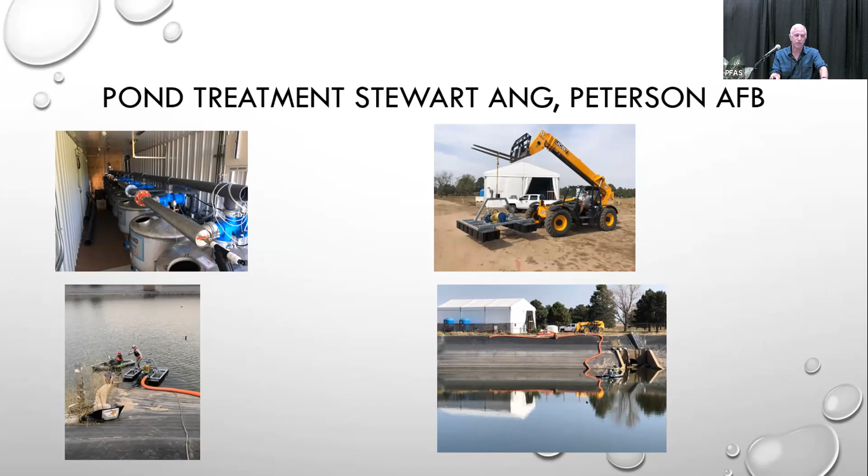This is a site you may have heard of from one of my past discussions: Cannon Air Force Base, Clovis, New Mexico. The site wells right before these dairy farms had 25,000 PPT of PFAS. The first irrigation well across the road from the base had 14,000 PPT. Turns out the water they were feeding the cattle with had 1,700 PPT, and the cow's milk had 700 PPT.

I was the one who had to tell the farmer that he couldn't sell his milk anymore. He said, 'Why?' I said, 'Your liabilities were going to be much more than losing your farm.' He said, 'Well, can I sell the beef?' So then we had to go sample the beef to see if he could even sell that. So CDC — don't ask me why CDC has a 400 PPT regulation on PFAS in food, don't ask me how CDC came out with that, but that's CDC, not the Food and Drug Administration, controlling what's in your food stream.

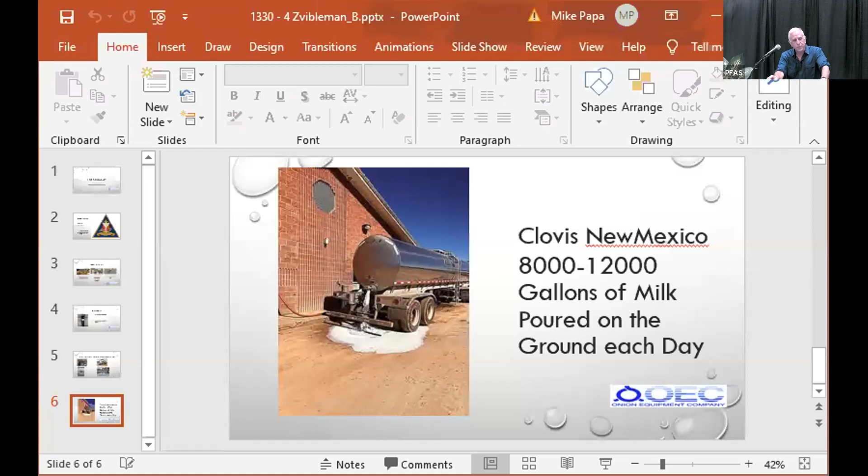Oops, I thought there was one more. Oh, anyway, so we have over 20 systems operating right now.

Every one of these systems is different. We're pretty much going to hybrid systems where we're using carbon first, and the carbon we can use for backwashing. We're getting everything down to 5 microns. If we're treating ponds and streams, we're using strictly sand filters so we can backwash those. The carbon does a lot of the lifting, but the ion exchange keeps us going - we're up to about 350,000 bed volumes in one job right now. It seems to be most cost effective for us at this point.

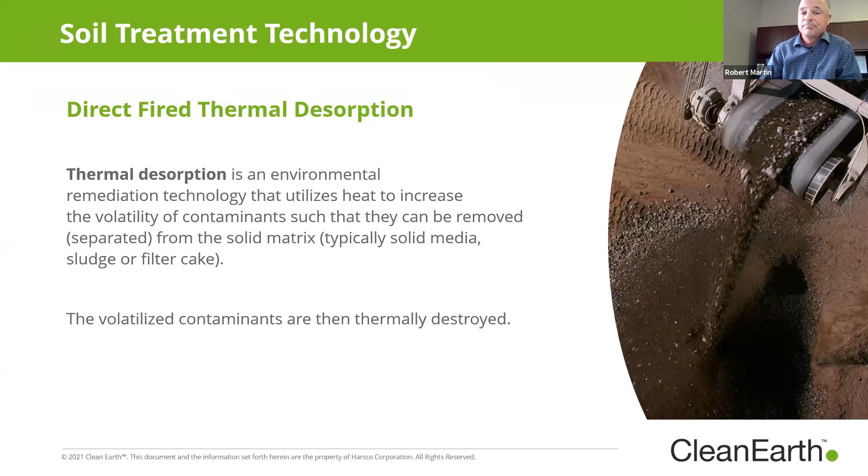From such technology and such equipment, we really only end up with two effluent streams: the soil, which ends up coming out at the end of the process with all of the fines that are generated within the process re-entrained or commingled back, and our process effluent air, which is exhausted post an ID fan on the backside of a bag house.

This particular technology setup is what's considered a hot configuration for thermal desorption units. That being the airstream stays warm through the process just prior to arriving at the bag house, so any of the contaminants that are desorbed in the primary unit stay relatively warm or hot until they end up going through our secondary treatment or thermal oxidation.

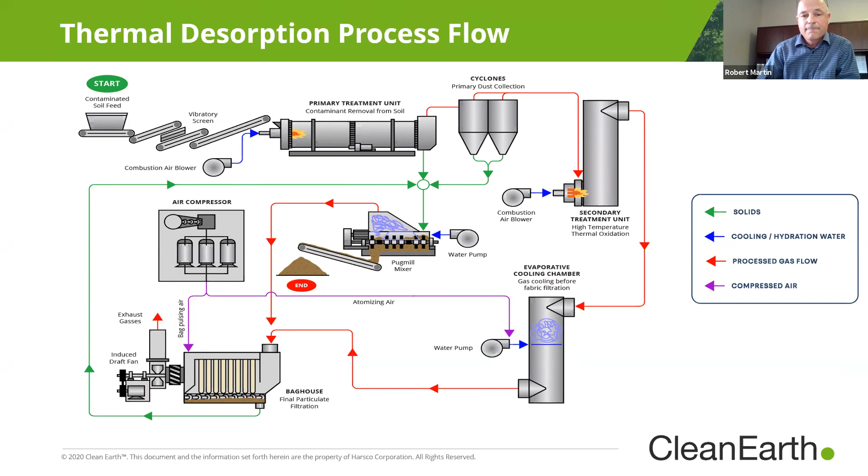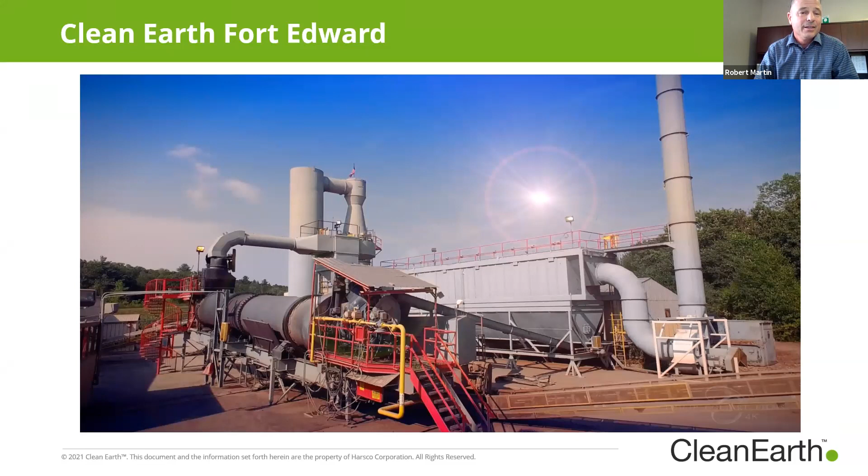Picture of our Fort Edward facility. This is in upstate New York, by which I mean the area up by the Adirondack Park. For those familiar with Lake George, we're not too far from that region. This gives you a better idea of what the facility layout actually is, and how the components are set and intermix with one another as far as the process itself goes.

So we'll get into a little bit about capacities, because capacities come into play in relation to the amount of soil we were actually granted to treat here along with the process.

Primary treatment unit, again, the rotary drum dryer. We have the ability to treat up to 65 tons an hour of contaminated soils. Retention times are roughly 6 to 10 minutes within the process, and we have the ability to get the soils up to 1,000 degrees Fahrenheit. Though at that temperature, we actually do not degrade the soil matrix itself — it retains most of its original properties. The only thing that may occur is some degradation in the grain size of material, depending on what the matrix itself is.

Our secondary treatment unit for thermal oxidation is a relatively large burner. We have the ability to operate up to 2,000 degrees Fahrenheit. Our permitted temperature at the facility is 1,512 degrees Fahrenheit.

Wanted to list out a few general contaminants that we treat, to give perspective of what the facility has the capability to do. We treat conventional fuels, coal tars — which up here make up about 70% of our business — and we also have the ability to treat PCBs.

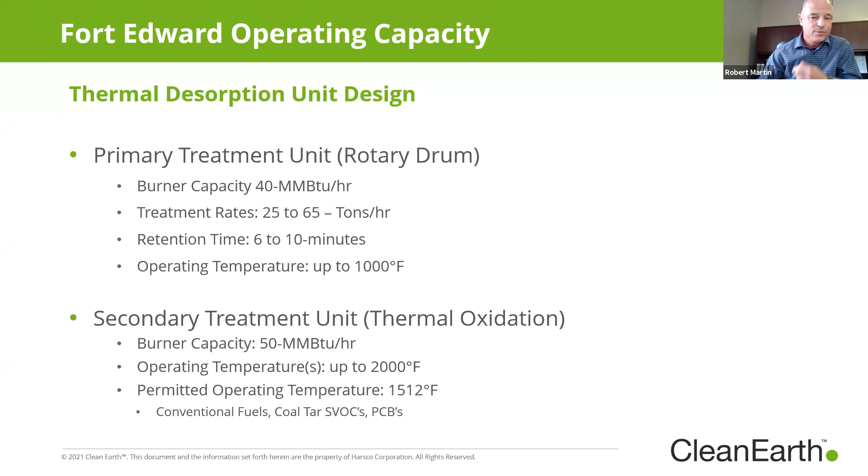So how this opportunity came about and was presented to Clean Earth: New York State, in investigating potential PFAS contamination at a property here in upstate New York, identified a source associated with that property for PFAS contamination, and actually followed that source to an off-site location. At that off-site location, the state decided they were going to remove the soils from the property. It was a residential property where they had identified this location.

At the same time, New York State, as part of their PFAS response, had started to look at the leachates from all of the local landfills. At that point, the landfills were not receiving or willing to accept any materials with PFAS identified in the analyticals. So, as has been discussed many times at this conference, this limited the options they had for managing such soils.

Clean Earth ended up receiving a phone call from the Division of Environmental Remediation asking if we had the ability to treat these compounds in soil. Discussions ensued since, by permit, it's not a listed contaminant for our location. Through discussions with DER and DEC — the Department of Environmental Conservation, who oversees the permits for this location — we worked through the state's RD&D process and Clean Earth ended up being granted registration to perform the treatment of the soils the state had removed from the property.

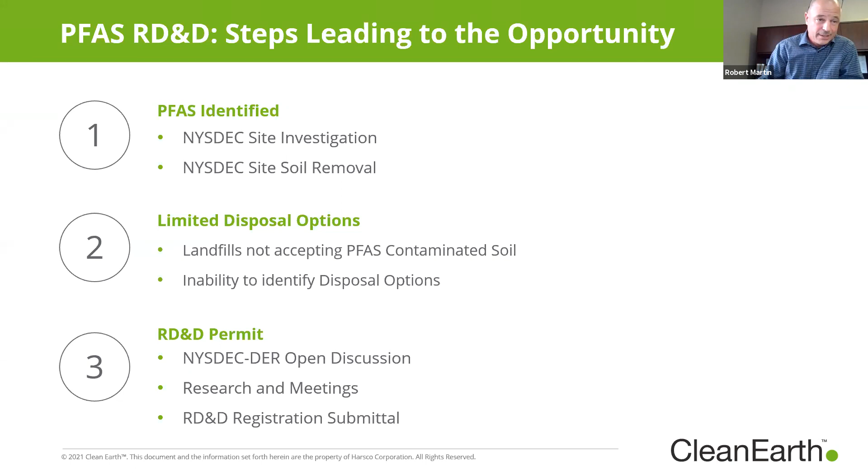So a little bit about the soil itself: it was actually removed from a very large garden area on a property. Soil organic matter was very high, somewhere between 7 and a little over 10%. The particular location where the material had stemmed from was a composting facility.

Part of their inbound source and what they used to produce some organic value within the soils was a de-inking sludge from a paper facility in the local area, which ended up being the source contaminant for the PFAS in the soils being managed at the location.

One of the things we generally tend to look at from a thermal desorption standpoint in soils is BTU value. Generally, you tend to only see higher BTU values associated with highly contaminated materials. The BTU value associated with this material was actually stemming from that organic matter within the soil. Having a 900 BTUs per pound value, if you do some back numbers on what wood has for BTU,

you come up with about that number, and that was really the basis for that BTU value. And moisture content, the material was relatively wet. From a facility standpoint, we tried to target 18% on a dry weight basis, this being 28%, so it's relatively high, and takes additional energy within our system to manage just the moisture associated with the soils.

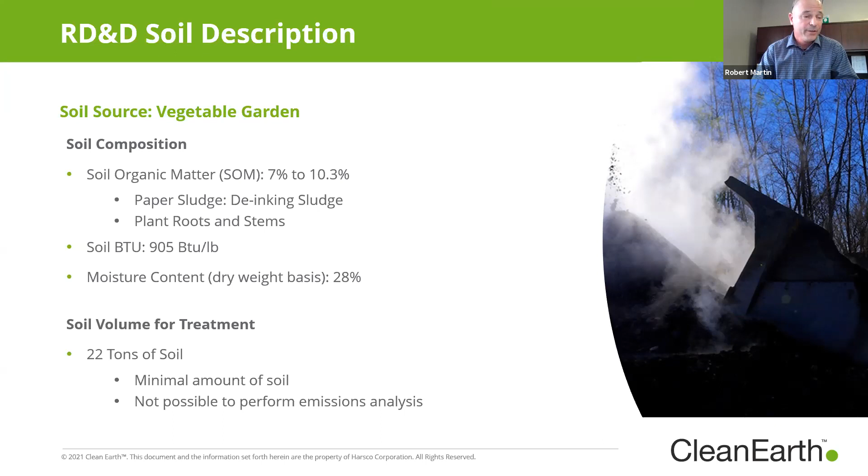But from a company standpoint, we wanted to see if and learn whether the technology can manage the soil and remove the contaminants. So what our thoughts were as far as what we wanted to do—we thought based on the high soil organic matter that we were going to run, and we should run our soil temperatures up relatively high.

So prior to the test, we actually targeted a treatment temperature of 900 degrees Fahrenheit, the thought being the higher the temperature, the higher soil organic removal we should have.

Our secondary treatment unit, or thermal oxidation system, under the approval provided by the state, we had to operate the unit at 1800 degrees Fahrenheit. Now, I should have mentioned previously, but our thermal oxidative system here at the facility has a retention time of 2.1 seconds. So as has been mentioned, about 1000 degrees Celsius.

Previously, EPA had some guidance documents at the time that said if you could maintain that temperature for a second, you should have adequate removal efficiencies. So the 1800 degrees, with the additional retention time in the system, were adequate for the state to allow us to perform this test on, again, a relatively small amount of material over a relatively short period of time.

The objectives we were given: New York State has what they call their 21 list of PFAS compounds. In order for Clean Earth to be able to reutilize these soils under our beneficial use determination, we had to have a total of less than 72 ppb for all 21 compounds.

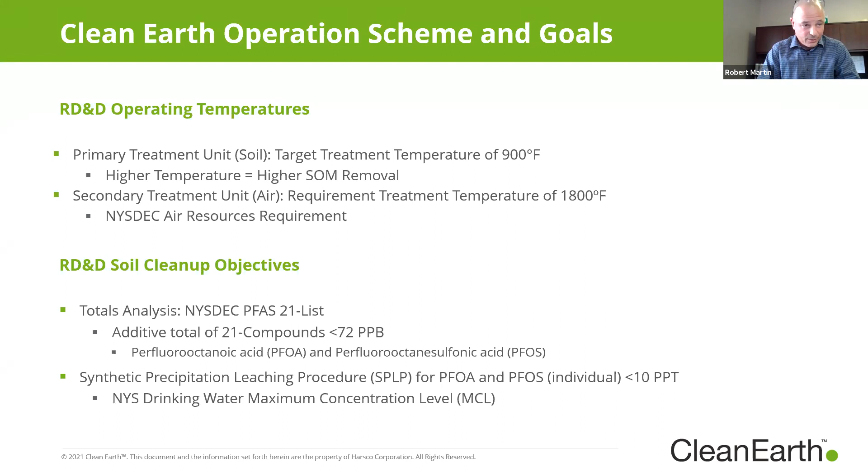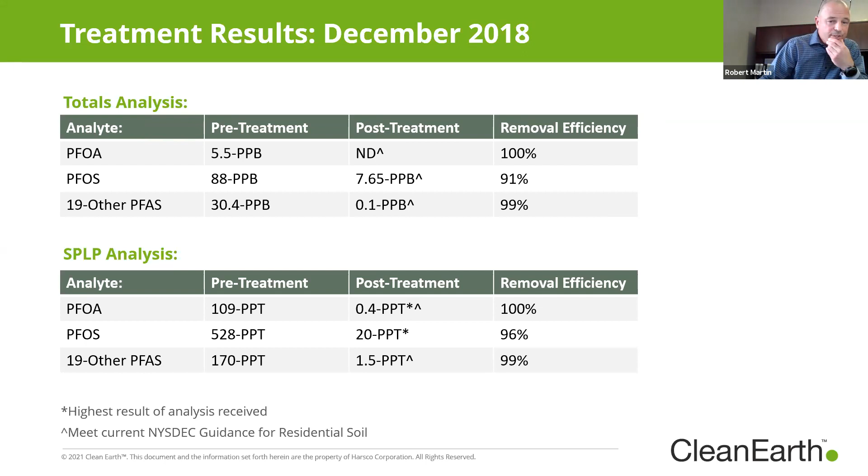So to continue on, as we talked about running at 900 degrees Fahrenheit, our average temperature during the test ended up actually being 912. We had a large reduction in soil organic matter, basically 9%. We did end up removing the BTU content associated with the soils, which makes sense because that organic matter within our system can become light, get caught in the airflow generated by our fan, and end up within the oxidation system as fuel. So the reductions there were expected and anticipated.

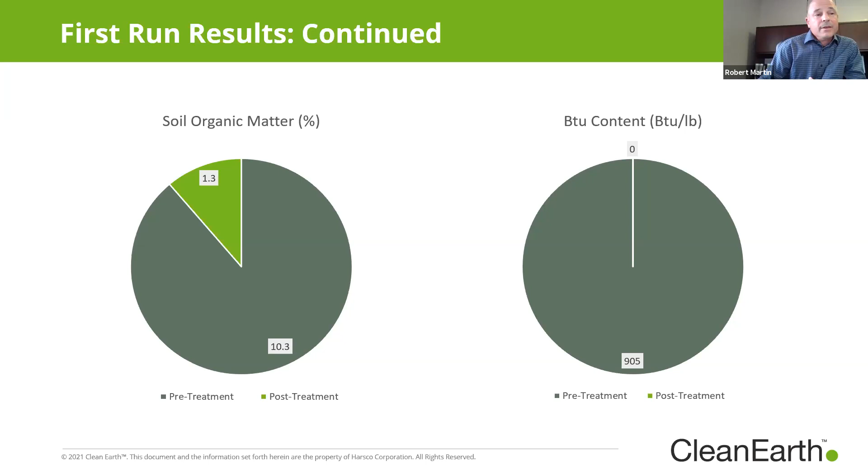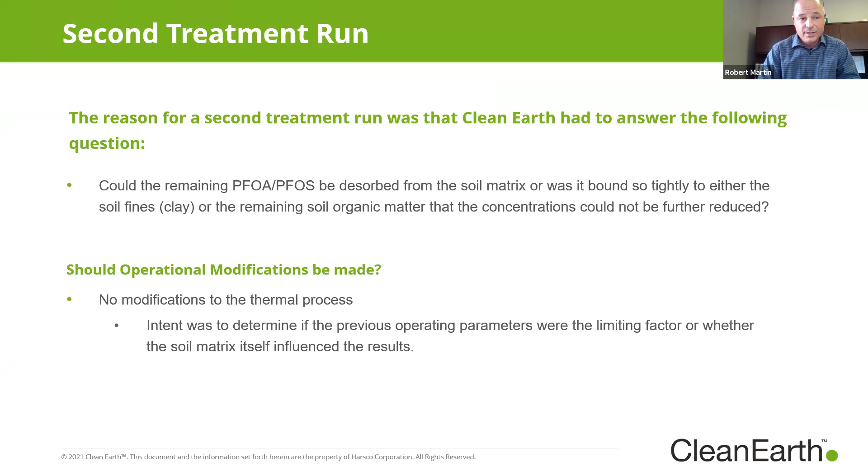Post all that analysis and trying to determine whether we should run the material a second time, we had a question we wanted to answer: could those compounds remaining within the soil be desorbed, or were they so tightly bound to the clay fractions or soil organic matter that they would not be removed or reduced? Second question was whether we should modify anything within the process operation, which we decided not to. The thought being that if the process stays consistent, we can point to whatever occurs from results and have that truly related just to the soil matrix itself, not the process and management within the equipment.

So in February of 2019, we decided to run the material a second time. As you can see by the results, we were able to get the analysis down to non-detects on both our totals and SPLP analysis. The question may come up as to what ND actually stands for. Non-detects on the totals was less than 1 ppb. Non-detects on the SPLP was less than 1 ppt. So very low numbers. The analytical at the time was done by Test America.

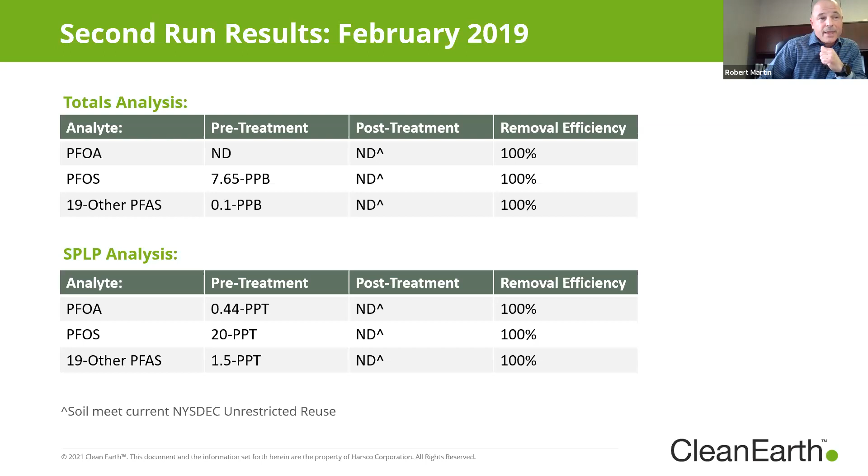The other interesting thing we found was that from the soil organic matter standpoint, we had some reduction, but obviously not complete reduction. So it didn't really answer the question of whether those materials were bound within the soil organic matter, although 0.3%, as we all know, can represent a relatively large concentration when you're talking about parts per billion or trillion, but perhaps not as intuitive as we hoped it might be if such concentrations ended up being non-detectable.

So what did we learn from the whole process? We learned that the technology, as presently deployed, does have the ability for the targeted PFAS compounds, or those identified in the analytical, to desorb them from the soil matrix, and adequate to meet the New York State DEC residential reuse criteria developed in 2020, and also able to meet an SPLP requirement for drinking water standards for the state of New York.

We were hoping to have a little more correlation that we could identify between soil organic matter concentrations and the PFAS either retained or released from the soils. Quite honestly, we don't have enough data to determine whether there was truly a correlation there. From our standpoint, that will be determined by performing additional analysis full scale on various soil matrices so we can determine if such a correlation actually exists. And the last obvious point here is that we still have plenty to learn.

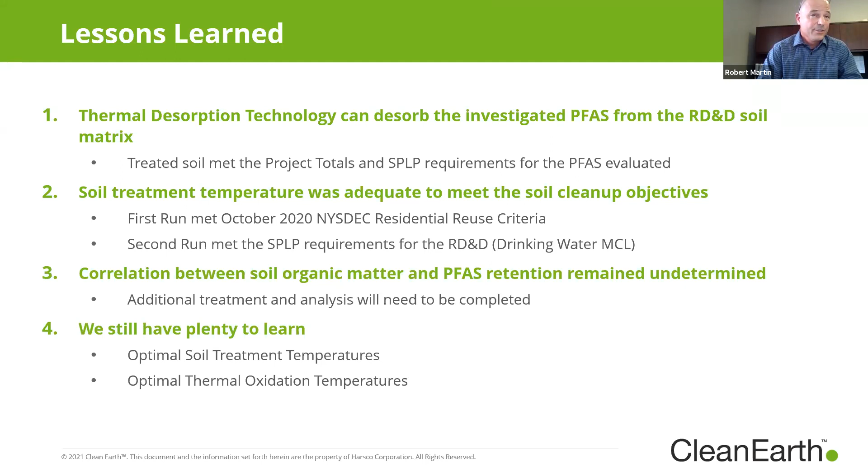During the same test, we tested at temperatures over 1700 degrees and ended up having lower removal efficiencies. A lot of that has to do with airflow in the system, straight lining flow instead of having turbulent flow within there. So we believe that the thermal oxidative temperatures which may ultimately be deployed within a technology may not be as high as generally predicted.

So what's next for Clean Earth? We have fixed facilities in 5 states. In total, we have 8 thermal desorption units, 6 which are fixed, and 2 which are portable that we've moved from one coast to the other, performing operations for Superfund locations. We're hoping to have more opportunities to test the technology and prove what we've been able to demonstrate during our initial testing.

What we're finding our largest constraints to be, first and foremost, is emissions. There isn't necessarily emissions guidance out there for allowable emissions, and the OTM 45 method for performing emissions testing has only recently been put out and not promulgated. We find in discussion with states there's a lot of holdback in relation to moving forward based on those two items. We had one state where everyone seemed to get on board with emissions, but then we couldn't come to an agreement on how the soil may be able to be reused post-treatment.